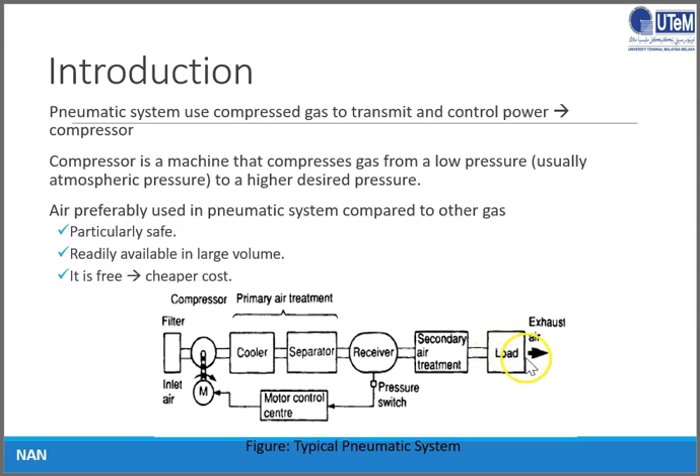And next it will go to a receiver, and the system will check, and the motor will control the compressor. Okay, next the air will go to a secondary air treatment, and lastly it will go to load, such as a cylinder. Okay, this is the advantages and disadvantages of pneumatic system compared to hydraulic system.

So the advantages of pneumatic system: first, air possesses lighter weight, so lower inertia, an advantage in accelerating and decelerating the actuator. The second is lower viscosity, so the effect is smaller frictional pressure and power losses. And third, the compressed air can be contained in a container.

Fourth, the air is exhausted directly back into the surrounding environment, and the effect is a clean byproduct. And the fifth, the air source is infinitely available, thus less expensive.

And the disadvantages compared to hydraulic system: the installation of pneumatic system is relatively expensive because it requires installation of air producing equipment such as compressor, air filter, lube tube, dryer, regulator, etc. Okay, and the second disadvantage is it is easy to leak and condense.

Third, it is difficult to have precise control of actuator velocity and positioning. And fourth, pneumatics are confined to low power applications due to the possibility of explosion, and normally the pneumatic system pressure is low, less than 17 bars or 250 psi.

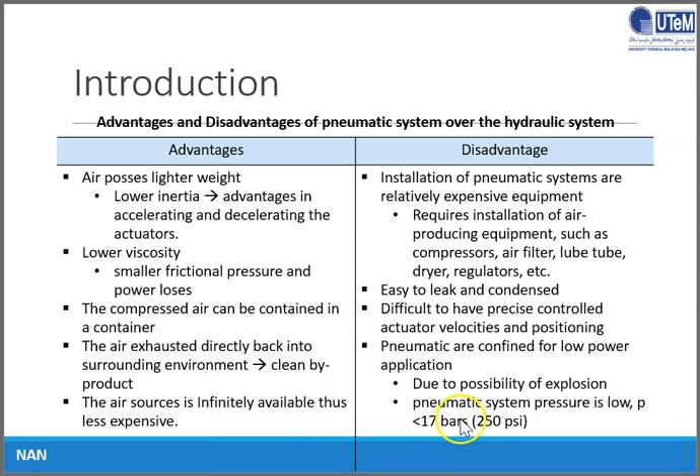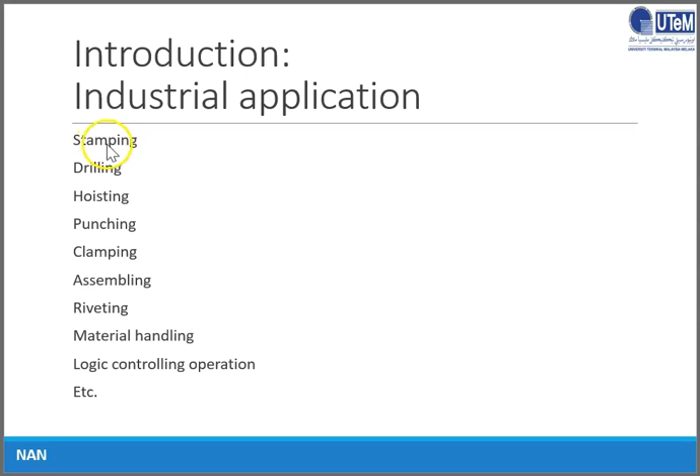Okay, this is the industrial application that uses pneumatic system. For example, stamping, drilling, hoisting, punching, clamping, assembling, riveting, material handling, logic control operation, etc.

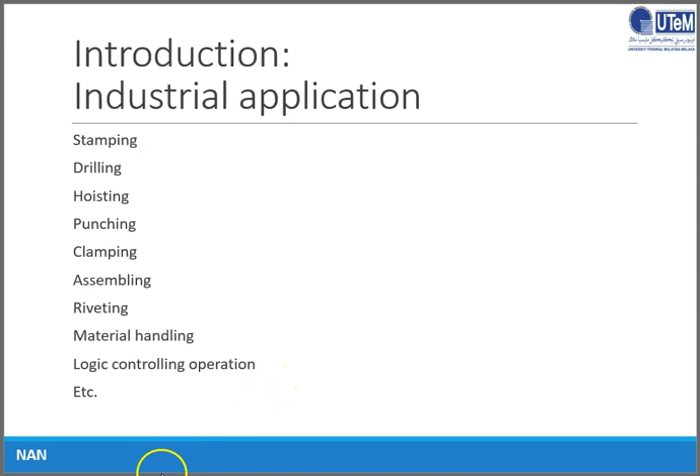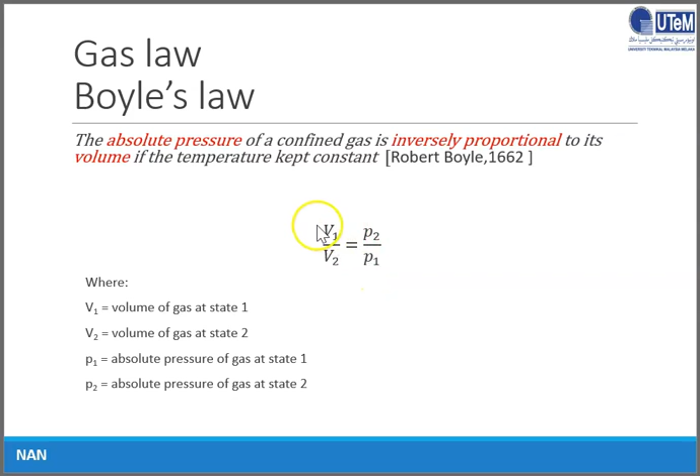Okay, next we will learn about basic gas law. There are 4 gas laws. First is Boyle's law. So the absolute pressure of a confined gas is inversely proportional to its volume if the temperature is kept constant. And this is the formula: V1 over V2 equals P2 over P1. V is volume and P is pressure.

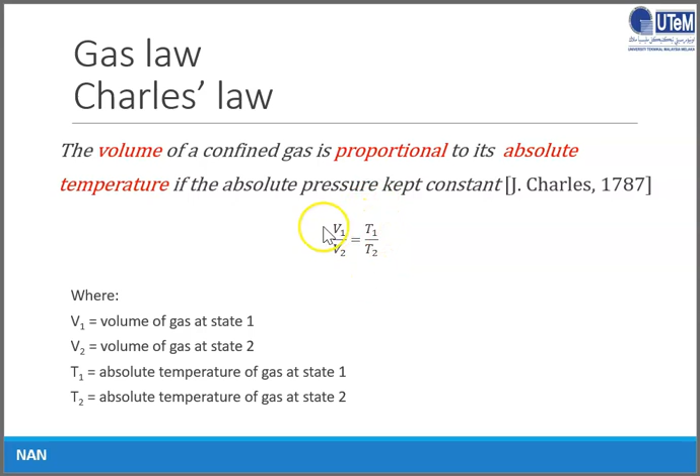Okay, next is Charles' law. So the volume of a confined gas is proportional to its absolute temperature if the absolute pressure is kept constant. So V1 over V2 equals T1 over T2, and V is volume, T is temperature.

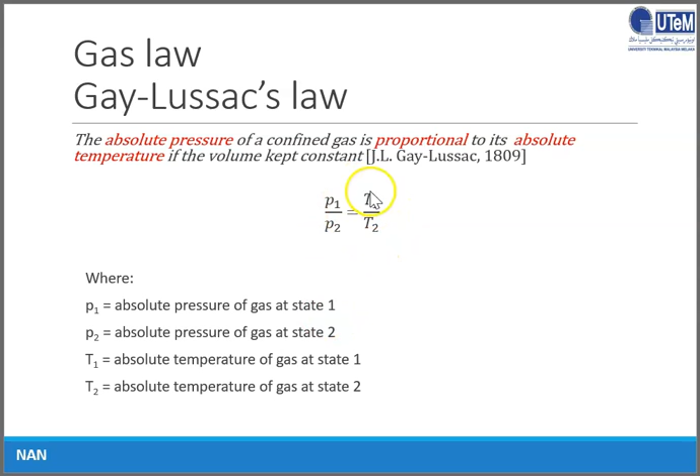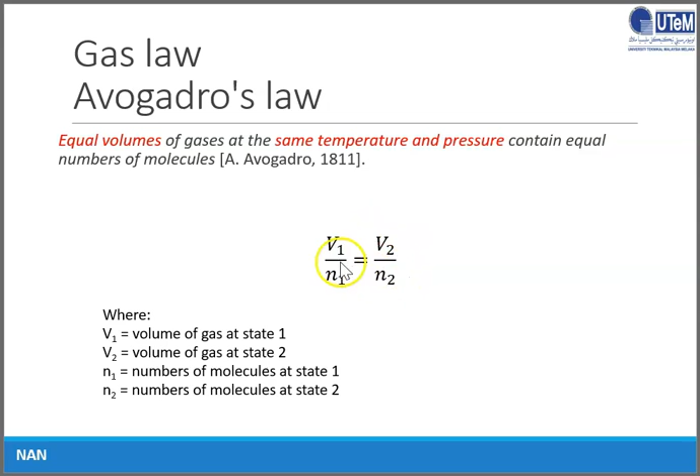And the fourth law is equal volumes of gases at the same temperature and pressure contain equal number of molecules. Okay, V1 over N1 equals V2 over N2. V is volume, N is number of molecules.

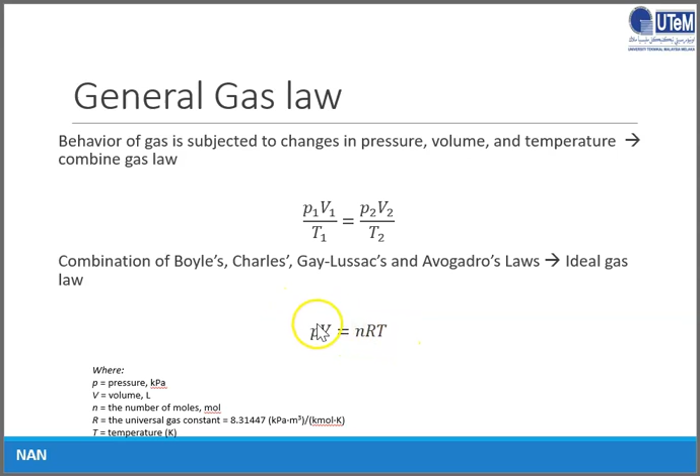Okay, so by combining all laws, then we will get the ideal gas law. So P1 V1 over T1 equals P2 V2 over T2, and the ideal gas law is PV equals nRT. And R is the universal gas constant.

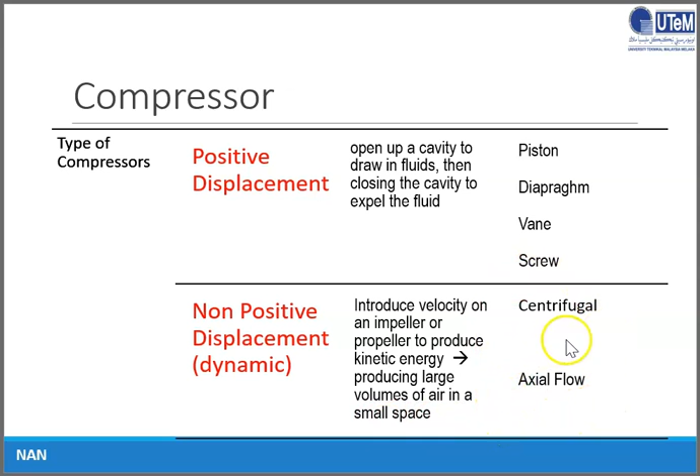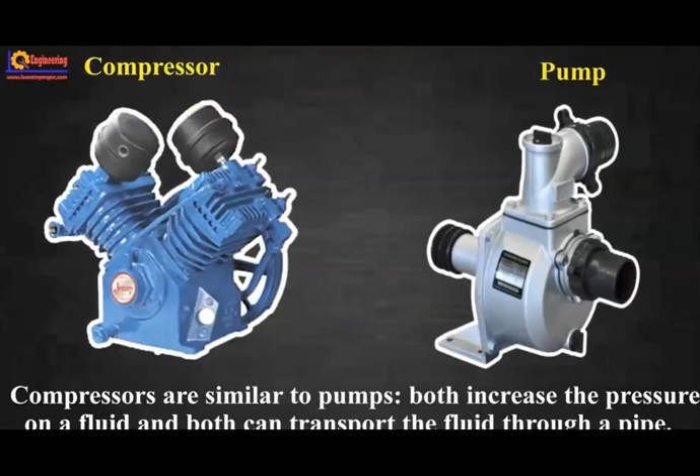A compressor is a mechanical device that increases the pressure of a gas or air by reducing its volume. Compressors are similar to pumps. Both increase the pressure of a fluid and both can transport the fluid through a pipe. As air or gases are compressible, the compressor also reduces the volume of air or gas.

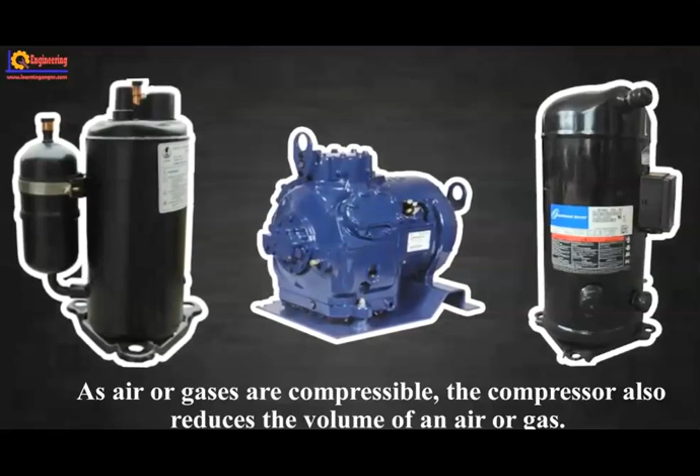In this video, we will see the different types of compressor. There are mainly 5 types normally used in our industry: 1. Reciprocating compressor, 2. Rotary compressor, 3. Scroll compressor, 4. Screw compressor.

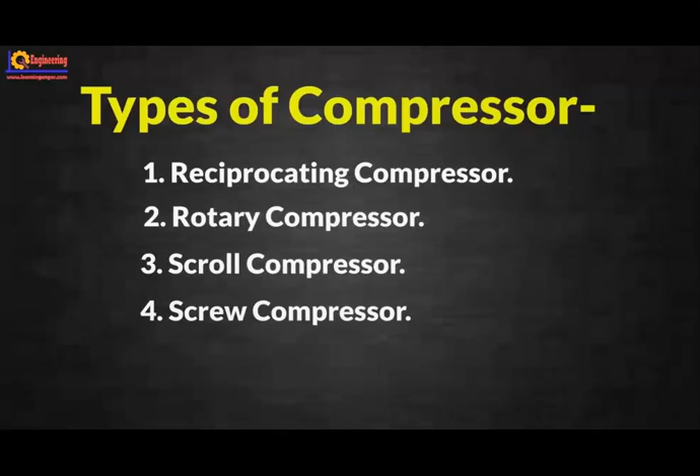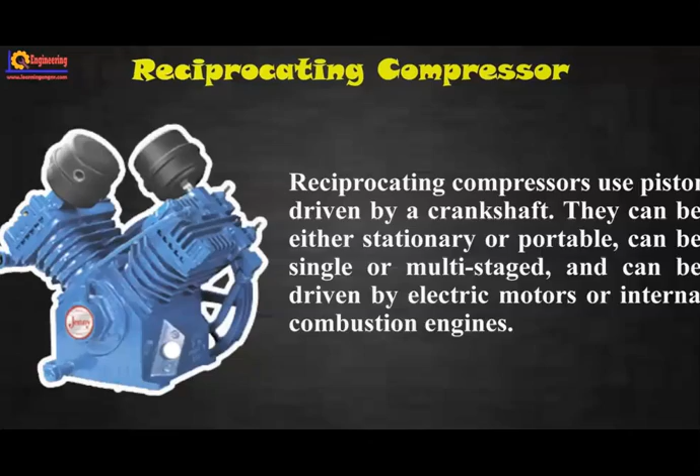5. Centrifugal compressor. Reciprocating compressors use a piston driven by a crankshaft. They can be either stationary or portable, can be single or multi-stage, and can be driven by electric motors or internal combustion engines.

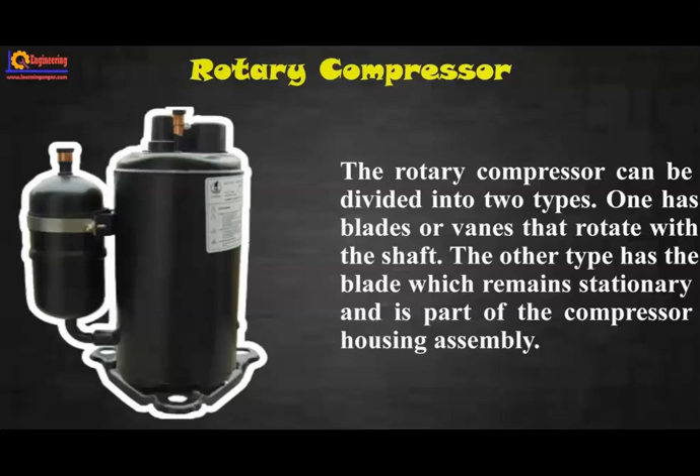Rotary compressor: these compressors are not of reciprocating nature, therefore do not have any piston and crankshaft. Instead, these compressors have screws, vanes, scrolls, and other devices which rotate and thus compress air or gas. The rotary compressor can be divided into 2 types: one has blades or vanes that rotate with the shaft, the other type has blades which remain stationary and are part of the compressor housing assembly.

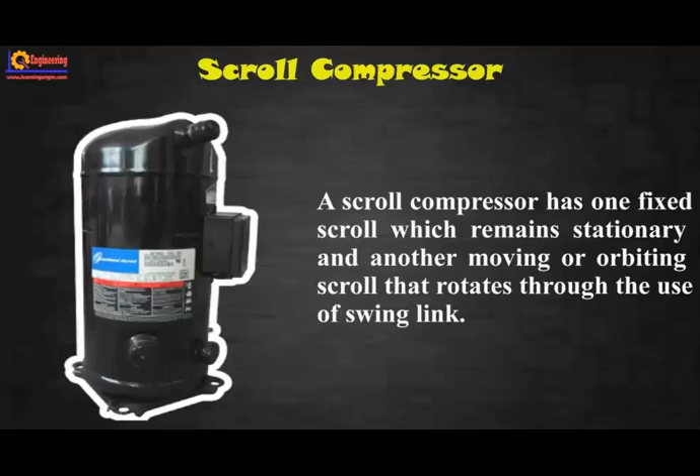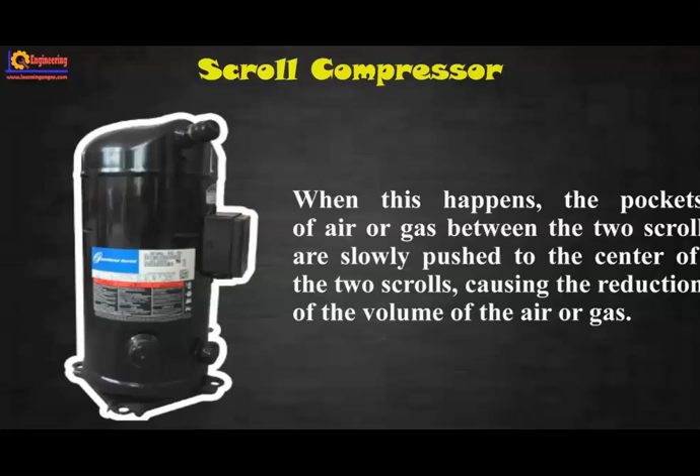Scroll compressor: a scroll compressor has one fixed scroll which remains stationary and another moving or orbiting scroll that rotates through the use of a swing link. When this happens, the pockets of air or gas between the 2 scrolls are slowly pushed to the center, causing the reduction of the volume of the air or gas.

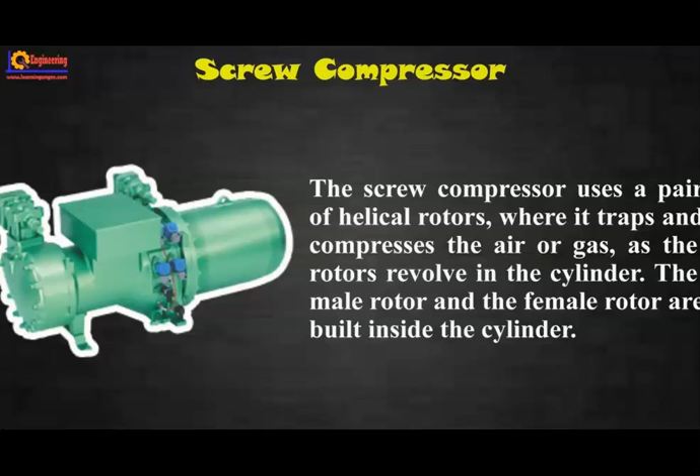Screw compressor: the screw compressor uses a pair of helical rotors where it traps and compresses the air or gas as the rotors revolve in the cylinder. The male rotor and the female rotor are built inside the cylinder.

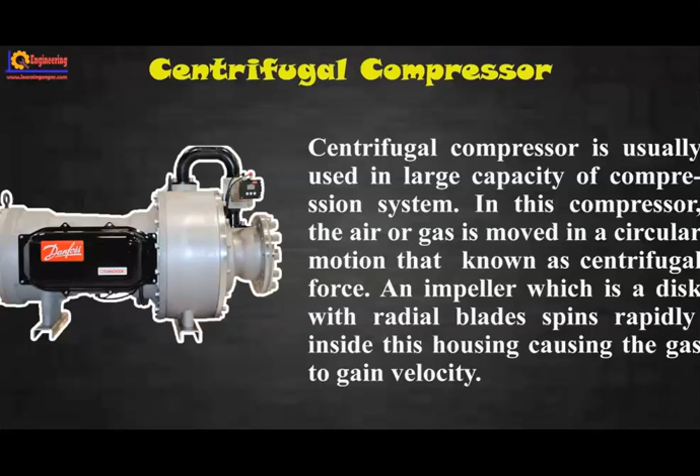Centrifugal compressor: this is usually used in large capacity compression systems. In this compressor, the air or gas is moved in circular motion, known as centrifugal force. An impeller, which is a disc with radial blades, spins rapidly inside the housing, causing the gas to gain velocity.

Next is criteria for compressor selection. The first criteria is the maximum, minimum, and mean demand. We need to consider the capacity of supply air and other economic factors such as the receiver, the power consumption, and the control system.

The second is ambient condition such as temperature, altitude, and humidity. The third criteria is method of cooling available. The fourth criteria is environmental factors such as noise and vibration, so for example special foundation may be required, particularly with reciprocating compressor. And the last is requirement for skilled maintenance personnel.

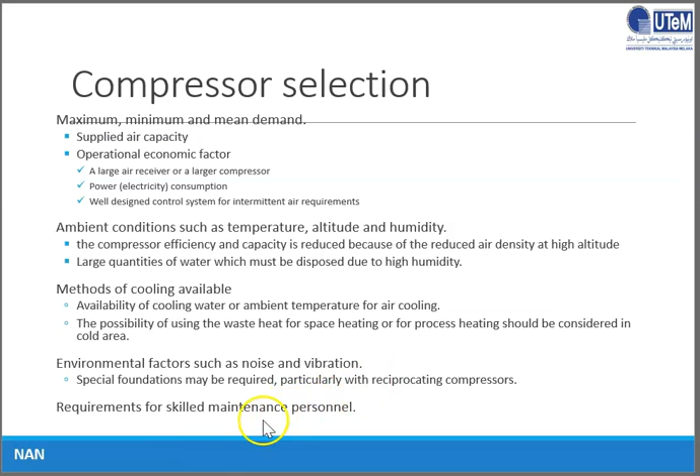Next slide shows how to calculate the airflow capacity. This is the formula to calculate the flow capacity. Q1 is the flow rate of the inlet, normally receiver, and Q2 is the outlet flow rate. P is absolute pressure, T is temperature.

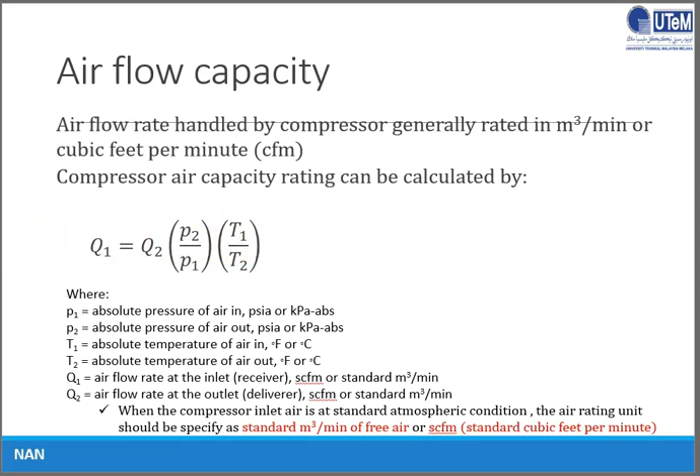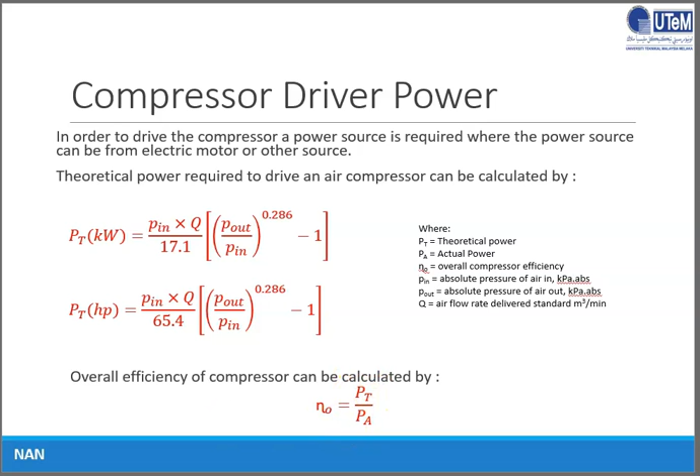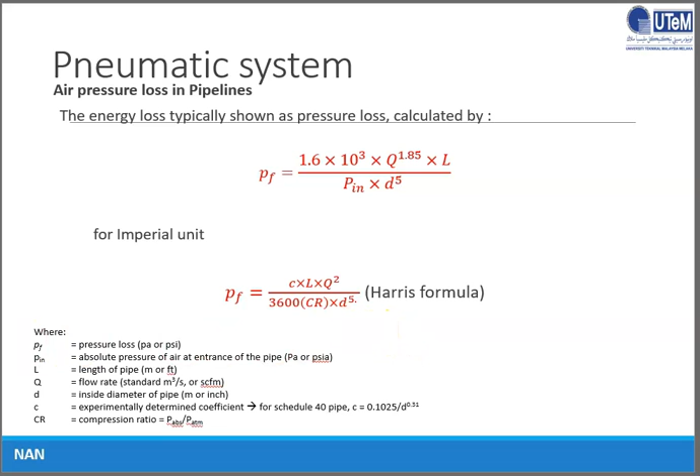Next is the formula to calculate the compressor driver power. To calculate the overall efficiency of compressor, we can use this formula: PT, theoretical power divided by actual power. Next is the formula to calculate air pressure loss in pipelines.

The second is performance of desired function. The system must be relatively insensitive to adverse conditions such as high ambient temperature, humidity, and dust, so system failure can be prevented. The third is efficiency of operation - a low efficiency compressor needs more electrical power to operate, which increases cost.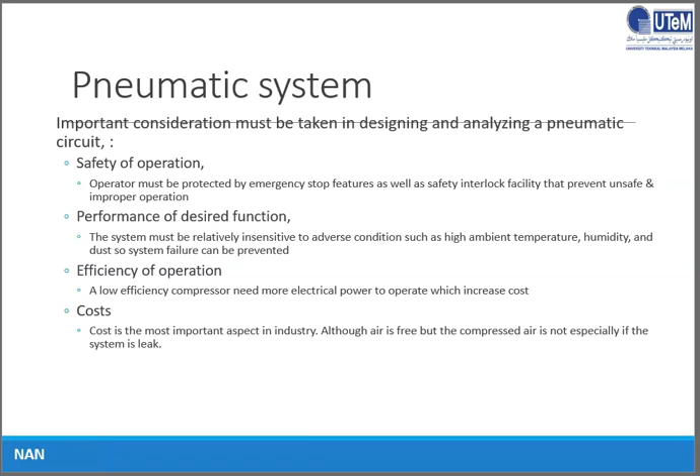The fourth is cost. Cost is the most important aspect in industry. Although air is free, the compressed air is not, especially if the system is leaked. That's all for this lecture on air compressor. Thank you.